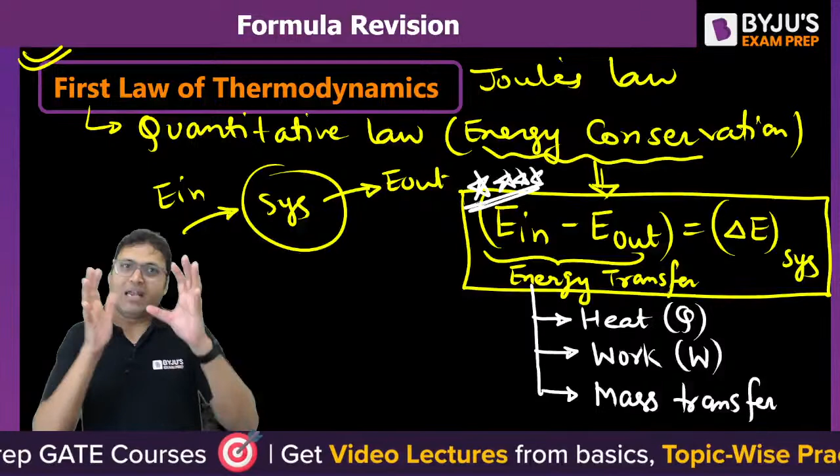So energy transfer is a boundary phenomena, but energy content of the system is not a phenomena, it is the property of the system. So the left hand side of the expression is energy transfer and the right hand side is the energy content of the system.

Are you getting it? So if the system is a closed system, what is the meaning of closed system? In case of a closed system, there is no mass transfer taking place, neither from the system to the surrounding nor from the surrounding to the system. Closed system means no mass transfer, only energy transfer.

Only energy transfer, isn't it? So energy transfer can either be in the form of heat and work. These are the two ways of transferring energy. There is no mass transfer, so energy transfer will take place.

So can we say our first law of thermodynamics, delta E for the system, is this Q minus W? The energy transfer is either in the form of heat. Let us say this is a closed system. Some energy entering into the system is in the form of heat, and energy leaving from the system is in the form of work.

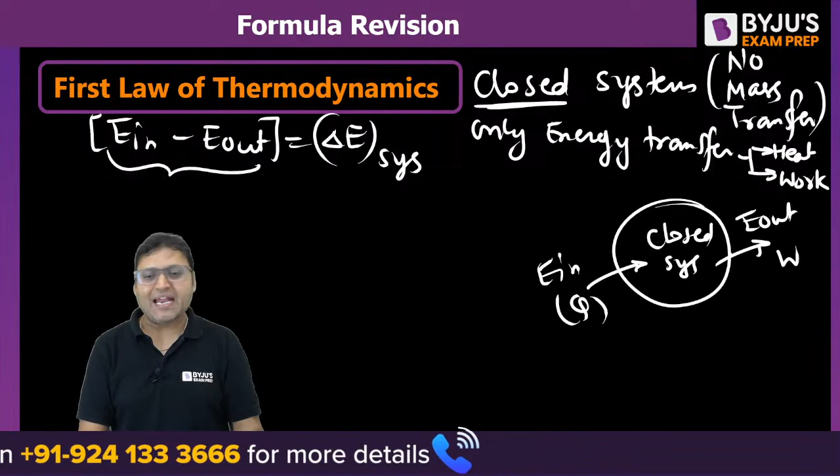So energy entering into the system is in the form of heat, and energy leaving from the system is in the form of work. Can we write it as: delta E, change in energy of a closed system, is equal to the sum of... so energy of a closed system is defined as...

Closed system energy is equal to sum of internal energy plus potential energy plus kinetic energy. For a closed system, the energy content is the sum of internal energy, potential energy, and kinetic energy.

So can we write our first law of thermodynamics for a closed system as Q minus W is equal to delta U plus delta potential energy plus delta kinetic energy? Do you guys agree or not? And one more thing I wanted to highlight here.

Whenever there is energy transfer taking place from the system to the surrounding or from the surrounding to the system, because the energy is in transition, that is why sign conventions are required for energy transfer. Whenever the energy transfer takes place, we always define a sign convention.

The general sign convention is: when heat is added to the system, it is taken as positive. When heat is rejected from the system, it is taken as negative. Similarly, when work is done by the system, it is taken as positive. Whenever work is done on the system, it is taken as negative.

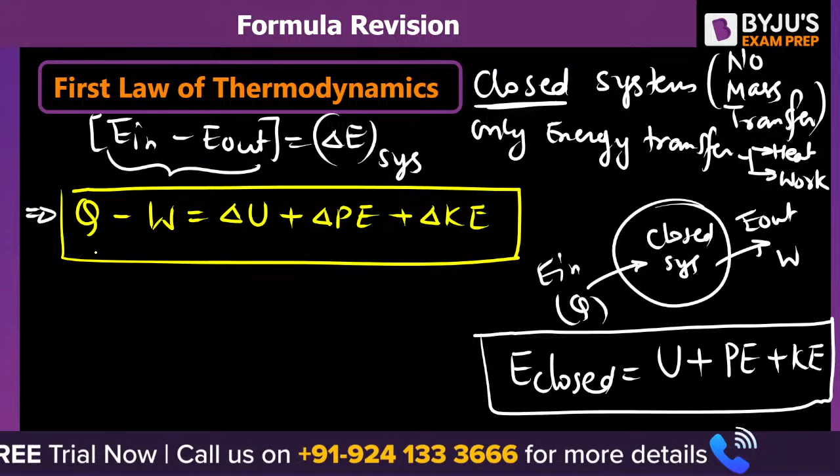So this is the expression if the closed system is stationary. That is for a closed system. This is the first law of thermodynamics for a closed system, if it is a stationary system, if it's a stationary closed system.

If it is a stationary system, what does that mean? There is no change in potential energy, there is no change in kinetic energy, it will be zero. So Q minus W is equal to delta U is our expression for the first law of thermodynamics for a closed stationary system.

This is the first law of thermodynamics for our closed and stationary system. Do you guys agree with it? Is this clear to everyone?

So whether the closed system is undergoing a reversible process or irreversible process, it does not matter. For the conservation of energy, reversibility or irreversibility of a process has nothing to do with it, because energy conservation is a universal concept or universal law. So whether the process undergone by the system is reversible or irreversible, the same expression will be used. I hope this is clear.

If anybody has anything to ask, let me know. Is this clear? Now, if the closed system is undergoing a thermodynamic cycle, what will be the expression for that?

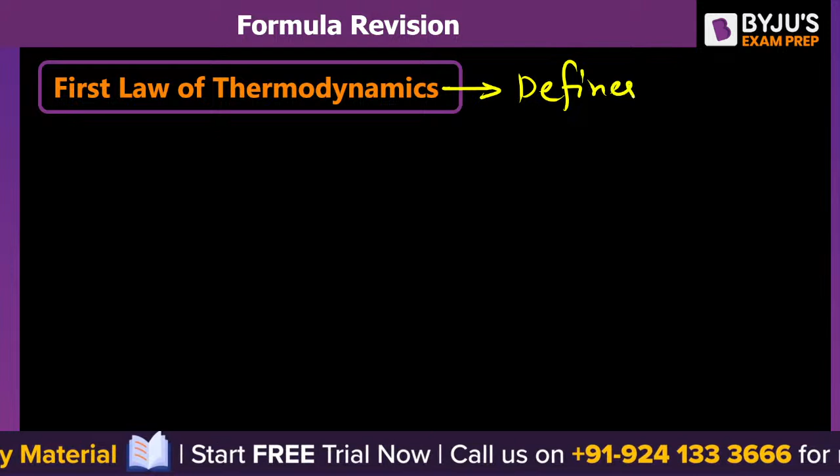First law of thermodynamics defines the energy of the system. According to this, energy is a conserved property of the system.

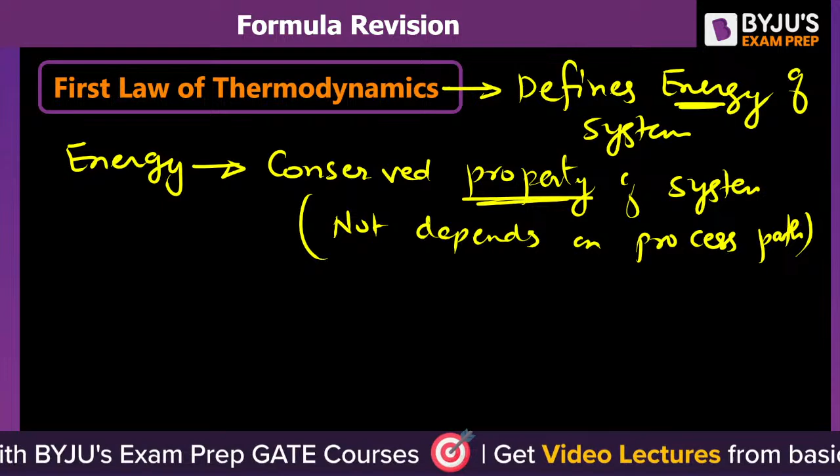It means energy does not depend on the process path, whether the process is reversible or irreversible. So energy of a system is a conserved property.

If we apply the first law of thermodynamics for a closed system undergoing a thermodynamic cycle, change in property will be zero, because for a thermodynamic cycle, initial and final states are the same.

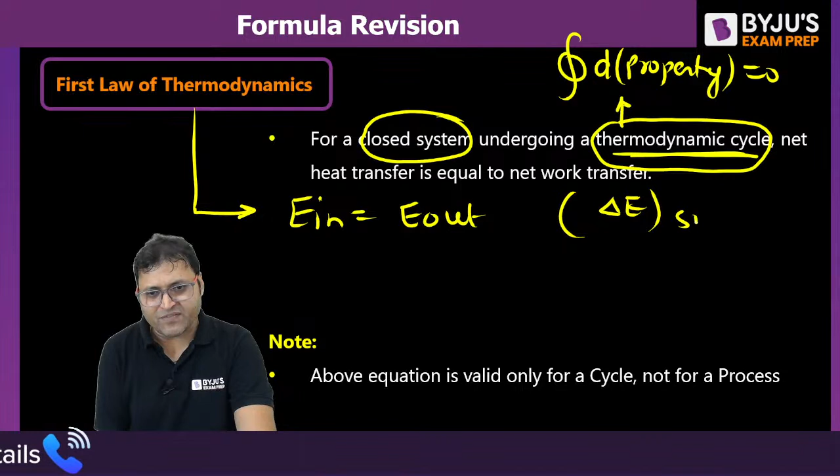So first law of thermodynamics can be written as E in is equal to E out, because change in energy of the system will be equal to zero. So energy entering will be equal to energy leaving from the system.

Energy entering takes place in the form of heat transfer, and energy leaving from the system takes place in the form of work transfer. So we can say Q net is equal to W net, or cyclic integration of del Q is equal to cyclic integration of del W. These are the various ways of writing the first law of thermodynamics for a thermodynamic cycle.

This is how we write the first law of thermodynamics for a cycle, and this equation is valid only for a cycle, whether it is reversible or irreversible, it does not matter. This equation, Q minus W is equal to delta U, is applied for a closed system undergoing a process.

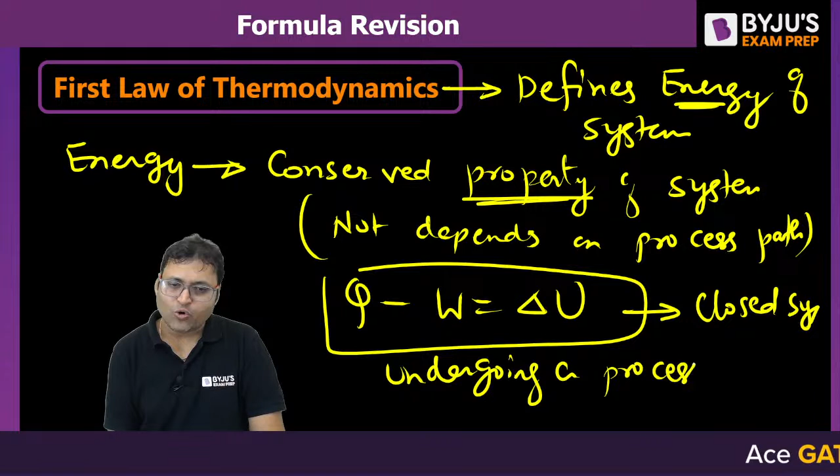Closed system undergoing a process, whether the process is reversible or irreversible. Or we could have written it as Q is equal to delta U plus W, one and the same thing. So this is the expression for a closed stationary system undergoing a thermodynamic process, and this equation is valid for a closed system undergoing a thermodynamic cycle.

As long as the bottle is closed, whenever there is no mass transfer taking place - if the bottle is open, then mass transfer will take place in terms of steam. The steam will evaporate from the system, then it becomes an open system. But as long as the cap is closed, the steam will not go out of the system, so that is why it is a closed system.

Closed system and open system are only defined with respect to the mass transfer. It has nothing to do with energy transfer. Closed or open system are defined only with respect to the mass transfer taking place across the system boundary. I hope this is clear.

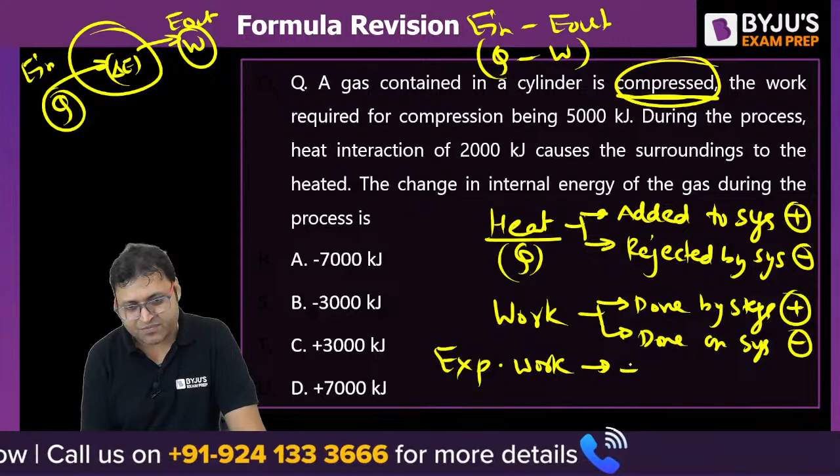For expansion, we can say work is done by the system. Expansion work is positive because it is done by the system, and compression work is negative because it is done on the system.

Expansion work is positive because the work is done by the system for expanding the gas, and compression work is negative because the work is done on the system to compress the gas.

So a gas contained in a cylinder is compressed. The work required for compression is 5000 kilojoule. Can we say W is equal to minus 5000 kilojoule?

Please give me yes. During the process, heat interaction of 2000 kilojoule causes the surrounding to be heated. When the surrounding gets heated, the heat is rejected by the system to the surrounding, isn't it?

So do you agree Q is also minus 2000? W and Q both will be negative.

Then the change in internal energy of the system during this process, if we write the first law of thermodynamics, Q minus W is equal to delta U. What is Q? Put the value along with sign. What is W? Put the value along with sign. Delta U is U2 minus U1, final internal energy minus initial internal energy.

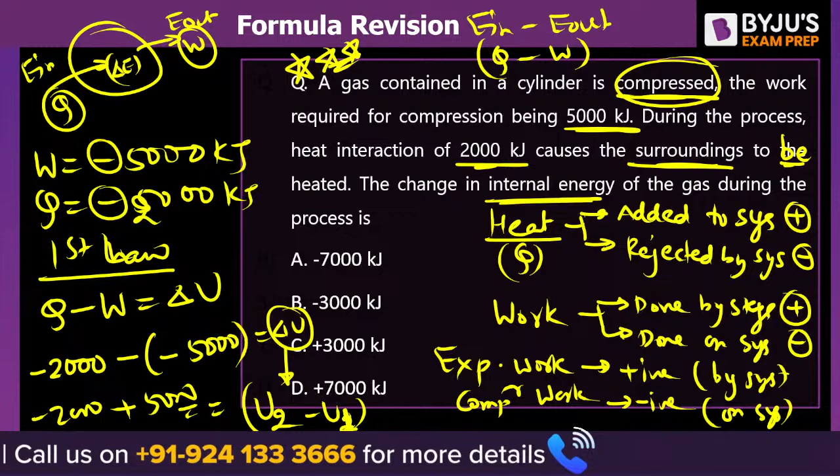Chintu, others, Paglesan, why you guys are committing the mistake? One incorrect sign convention will definitely destroy your whole fundamentals. It will shatter your fundamentals. So take care of the sign of heat transfer and work transfer.

So the correct answer is option number C. It will be plus 3000. I hope this is clear.

Let us move to the next one. Now I want everyone to give me the correct answer. Please do give me the right answer for this one. It is your turn. The more you practice on your own, the more confident you become. And the game is all about the confidence level.

If you are confident enough to clear the examination, 60 to 70% of the job is already done. But if you are afraid of clearing the examination, you will perform badly. So to develop the confidence, you should start writing on a piece of paper. Even if you are getting the incorrect answer, it does not matter.

So the answer to this question, every one of you, please give it a try. Yes, Paglesan, good, good, good. Mechanical engineer. In an adiabatic process, what is adiabatic process? Heat transfer is equal to 0.

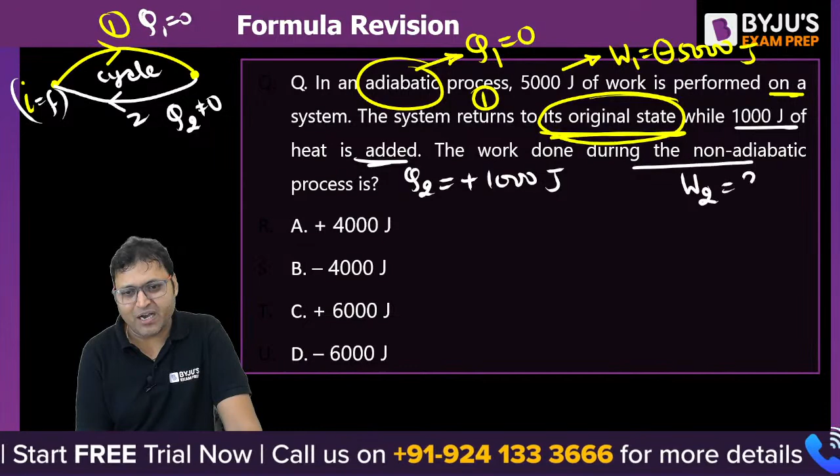The work done during the non-adiabatic process will be how much? So first law, if we apply for a cycle, then we can say energy entering is equal to energy leaving, or we can say net heat transfer is equal to net work transfer in a thermodynamic cycle. So the total heat transfer Q1 plus Q2 is equal to W1 plus W2. This will be the expression.

Q1 plus Q2 is equal to W1 plus W2. So Q1 is 0, and Q2 is plus 1000, which is equal to W1. W1 is minus 5000 plus W2. So you can easily find out the value of W2. Put the values with their signs properly, then you will get the answer.

What is the answer, Vinod? Is it B or C? Again you are committing a mistake. What is the answer, B or C? That is where you guys are committing mistakes. Do not repeat the mistake. Even if you commit the mistake once, it is acceptable. Even if you commit the mistake twice, it is a learning, it is an alarm sign. But if you repeat the same mistake a third time, then you should pay for it.

So it will be plus 6000. C will be the right answer. Well done, guys, well done. I hope this much portion is clear to everyone of you.

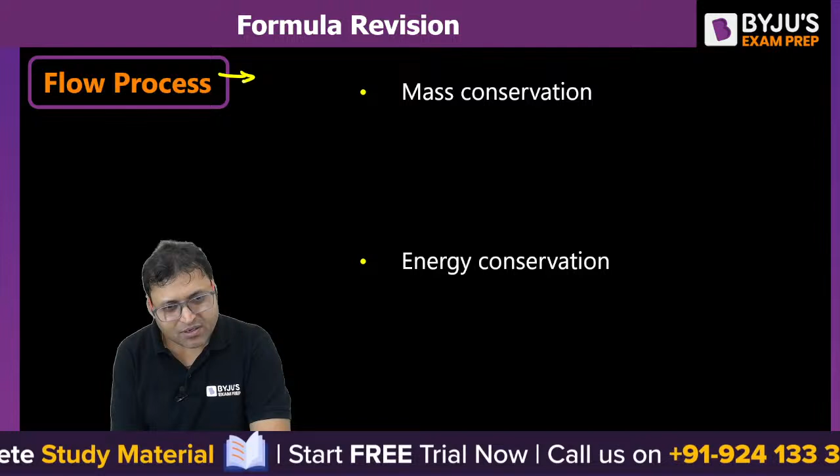Any doubt so far? Now let us try to observe the flow process. What is the meaning of flow process? When the mass flow takes place across the boundary of the system, such a system is called an open system. In an open system, there is mass transfer taking place.

So if we talk about the first law of thermodynamics for an open system, according to mass conservation, can we say mass entering minus mass leaving is equal to change in mass of the control volume? The analysis of the open system is done using the control volume approach.

Open systems are analyzed using the concept of control volume approach. This is a system, let us say an open system. Then there is mass entering and mass leaving. So according to mass conservation, whatever amount of mass entering minus amount of mass leaving from the system is equal to change in mass in the control volume.

Do you agree? Simple. Like energy conservation, mass conservation is also a fundamental or universal concept. Mass conservation and energy conservation are universal laws.

So if we write per unit time, we can say m dot I for inlet, minus m dot E for exit, is equal to the mass flow rate, which is equal to dm by dt in the control volume. The unit is kilogram per second. So the expression will be m dot I minus m dot E is equal to dm by dt. Do you agree? That is the simple mass conservation per unit time.

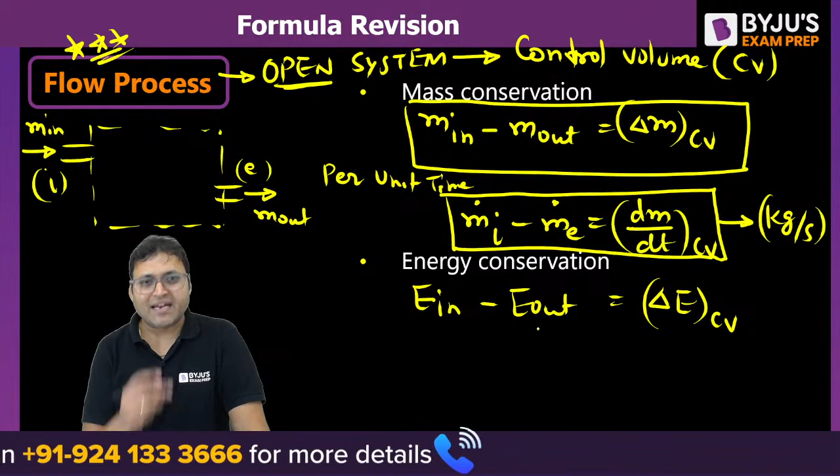Now if we talk about the energy conservation for a flow process, we can say energy entering minus energy leaving is equal to change in energy in the control volume. This energy transfer will be taking place with heat transfer, with work transfer, and along with mass transfer as well. So the left hand side will have three parameters: Q, W, as well as the mass transfer, isn't it?

If the process is a steady flow process—do you know what is a steady flow process? Does anybody have any idea about a steady flow process? Quickly, let me know. What do you understand by the steady flow process?

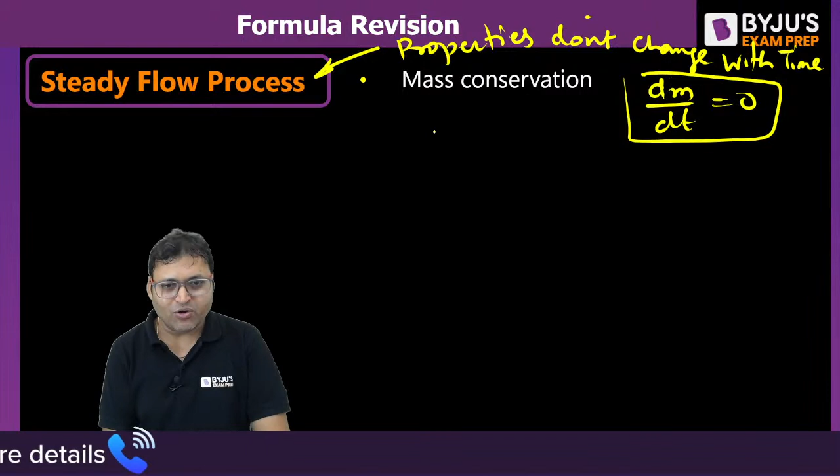If it is a steady flow process, it means the properties do not change with time, and mass is a property of the system. So we can say dm by dt is equal to 0, meaning change in mass with time is equal to 0. So the mass conservation equation becomes m dot I is equal to m dot E is equal to constant, which can be called m dot.

In case of a steady flow process, mass is entering at section 1 and leaving at section 2. This is our control volume. So we can say mass flow rate, rho 1 A1 C1, is equal to rho 2 A2 C2, is equal to constant.

What is mass flow rate? Rho AV, where C is the velocity, also written as V. So A1 C1, that is A1 into C1 by V1, is equal to A2 C2 by V2, remains constant. That is our mass conservation. What is C in this case? C is called the velocity of flow.

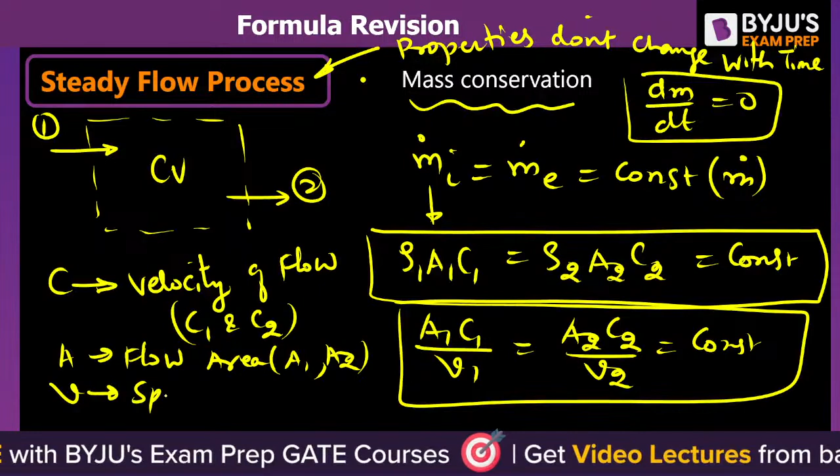Velocity of the flow of the fluid: C1 and C2 are at inlet and outlet. Similarly, rho is the density, A is the flow area - at inlet it is A1, at outlet it is A2. And V is the specific volume, which is the reciprocal of density. So at inlet it is V1, at outlet it is V2.

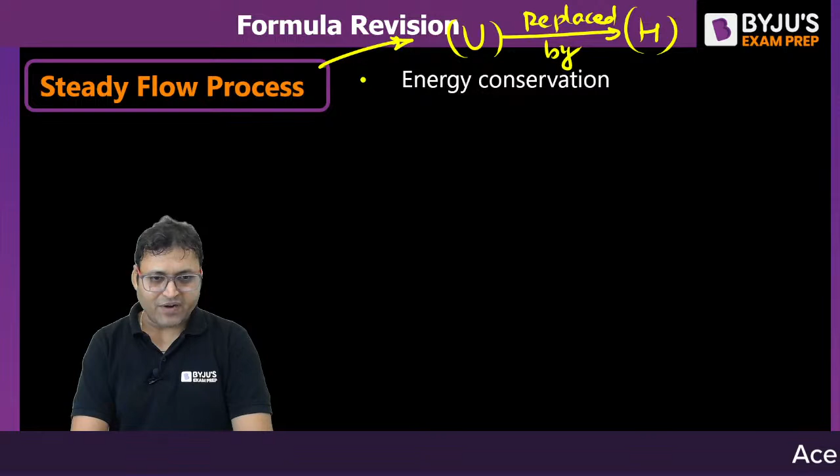So that is the mass conservation for a steady flow process. If we talk about the energy conservation for the steady flow process, then we can say in case of steady flow process, the internal energy will be replaced by enthalpy. So our expression for energy conservation will be Q minus W is equal to delta H plus delta potential energy plus delta kinetic energy. This is the energy conservation equation for the steady flow process.

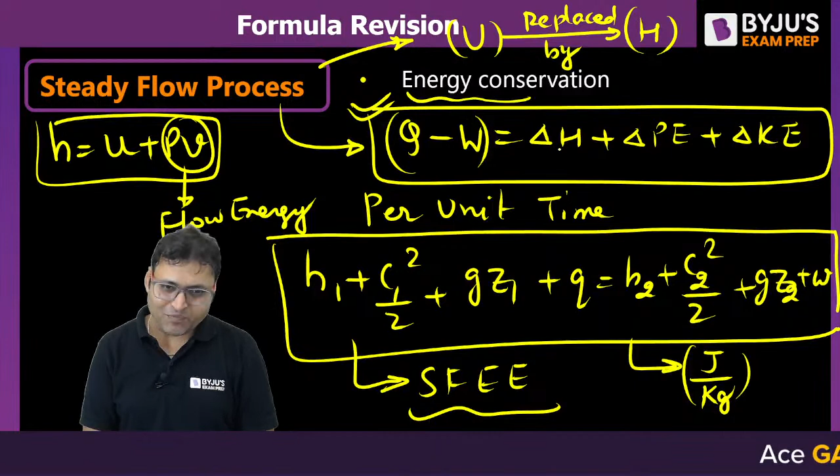Isn't it? If anyone has doubt where this expression came from, I can explain. In the left hand side there is a heat transfer, a work transfer, an energy transfer along with the mass transfer. In the right hand side, change in energy of the control volume. From this we will develop that internal energy will be replaced by enthalpy in case of steady flow process.

So steady flow energy equation is used for all the steady flow devices. What are the steady flow devices we use in our thermodynamic cycle? Like a compressor or turbine - turbine is a work producing device, compressor is a work consuming device, or it can be a heat exchanger like condenser or boiler, evaporator, or nozzle, diffuser.

All are treated as steady flow devices. Why are they called steady flow devices? Because they are operating in a particular environment for longer duration. So mixing chamber is also treated as steady flow device - these are some of the steady flow devices. Throttling device or throttling valve can also be treated as steady flow device.

So these are some of the steady flow devices where we apply the first law of thermodynamics, which is called steady flow energy equation: H1 plus C1 square by 2 plus GZ1 plus Q (heat transfer) is equal to H2 plus C2 square by 2 plus GZ2 plus W. 1 is for inlet or entry, and 2 is for outlet from the control volume or exit. The unit of each and every term is joule per kg.

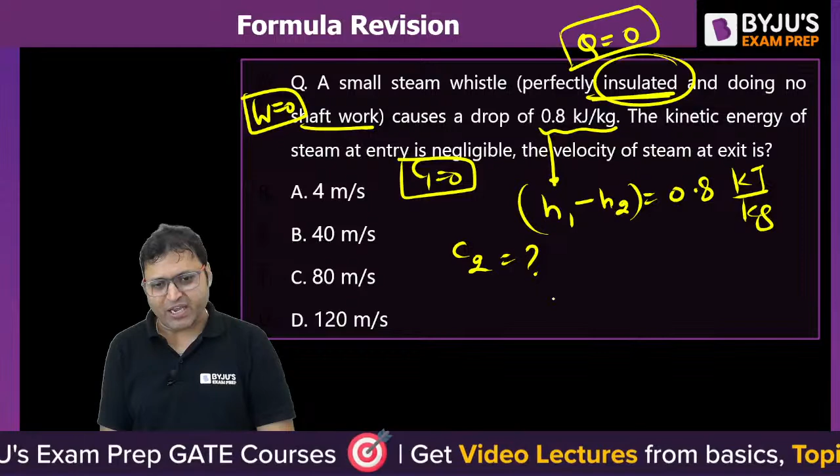H1 plus C1 square by 2 plus GZ1 plus Q is equal to H2 plus C2 square by 2 plus GZ2 plus W. C1 is 0, there is no change in potential energy, Q is equal to 0, W is equal to 0. So can we say C2 is equal to under root of 2 times H1 minus H2?

Put the value in their SI unit, do not forget to put the value in their SI unit. So 0.8 kilojoule per kg will become 800 joule per kg. So C2 will be equal to under root of 2 into 800. That will give you meter per second, isn't it?

So it is 40 meter per second will be the value of C2. The answer will be 40 meter per second. I hope this is clear. Is this clear to everyone?

Now let us move to the unsteady flow process. Unsteady flow process means change in mass in control volume is not 0.

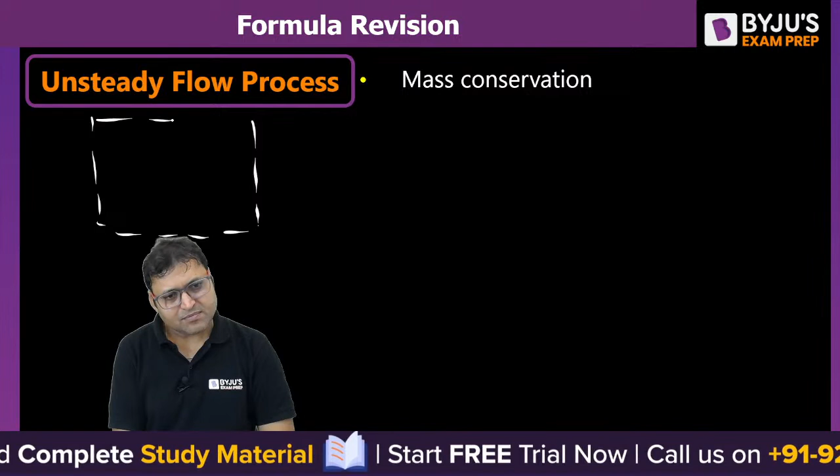Unsteady flow process. For unsteady flow process, there is mass entering, there is mass leaving, and there is some process undergoing by the system, 1 to 2. There is a process 1 to 2 undergoing by the system. 1 is the initial state and 2 is the final state. The state does not remain same with time, the properties will not remain same with respect to time. If the flow process is unsteady, so property changes with time.

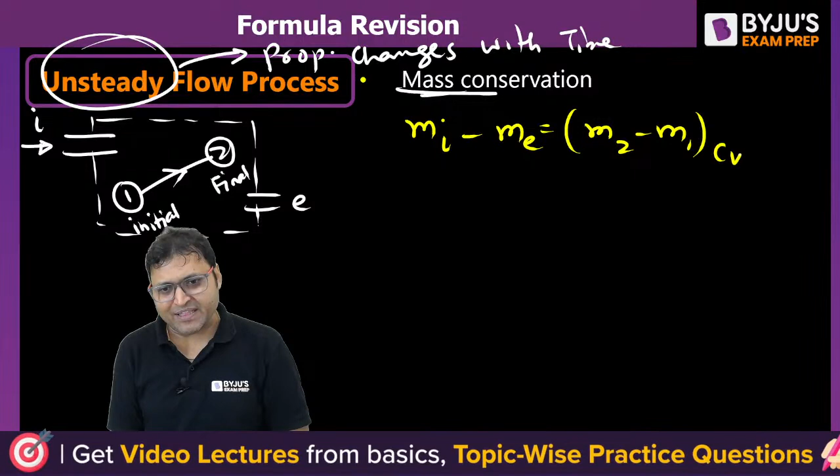So according to mass conservation, we can say Mi minus Me is equal to M2 minus M1 in the control volume. That is our mass conservation. Mi minus Me is equal to change in mass in the control volume. I for inlet or entry to the control volume, E for exit or outlet. 1 is the initial state of the system, 2 is the final state. This is the mass conservation equation: Mi minus Me is equal to M2 minus M1 in the control volume.

So if the system is initially evacuated, it means M1 is equal to 0. If the system is initially vacuum, if the system is initially empty, then M1 will be equal to 0. If the system is finally evacuated, then M2 will be 0. Please do understand, if the system is initially evacuated, then M1 is equal to 0, and if the system is finally evacuated, then M2 will be 0.

If there is no mass entering into the system, then Mi will be 0. If there is no mass leaving from the system, then Me will be 0. There are 4 different situations, accordingly we will put 0 whatever is applicable. Clear? If there is no mass entering into the system, Mi will be 0. If there is no mass leaving from the system, Me will be 0. If the system is initially evacuated, then M1 is equal to 0. If the system is finally evacuated, then M2 will be equal to 0.

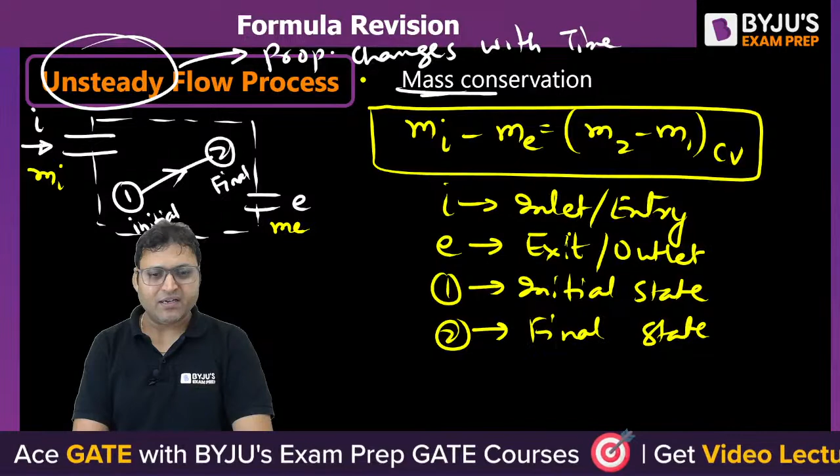If we write the energy conservation equation for unsteady flow process, so there is the heat transfer, 1 to 2. Let me call it heat transfer. Heat transfer to the system, work transfer from the system. This is I, inlet. This is exit, outlet. So there are 4 parameters, 4 points: I, E, 1 and 2. So heat is added to the system, work is done by the system. So according to the first law of thermodynamics or energy conservation equation, try to understand.

So it will be Q plus Mi. The energy conservation equation will be Q plus Mi Hi minus, this is E in, minus W plus ME HE, this is E out, is equal to M2 U2 minus M1 U1 in the control volume. That is the change in energy of the system. This is our first law of thermodynamics for

an open system undergoing unsteady flow process. The unit of each and every term is joule or kilojoule. The SI unit will be joule, and small u is the specific internal energy and small h is the specific enthalpy. It means joule per kg. Do you understand this expression? This is our energy conservation equation for the unsteady flow process. That completes our first law of thermodynamics. I hope this is clear to everyone.

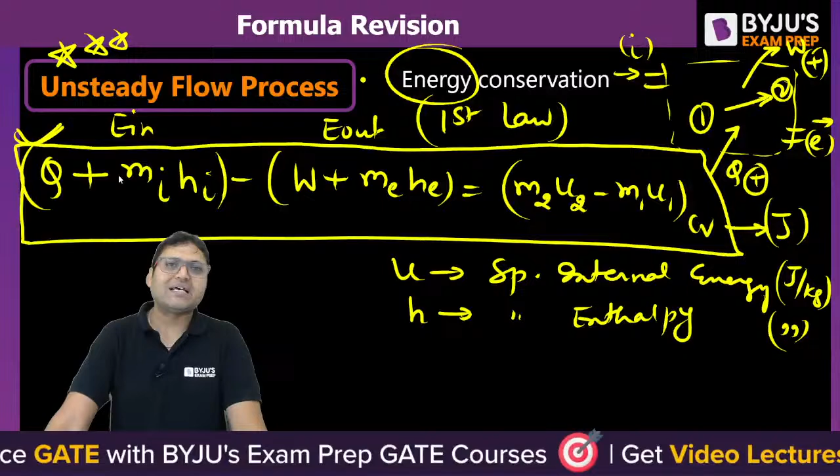Now let us move to the second law of thermodynamics. What do you understand by the second law of thermodynamics? Every one of you, please do let me know.

Second law of thermodynamics is also called qualitative law because it talks about the quality of energy. The quality of energy is not conserved, whereas it is the quantity of energy which is conserved. First law of thermodynamics is called quantitative law because it talks about the quantity of energy which is always conserved, whereas the second law talks about the quality of energy, which is not conserved. Quality means whether energy is in disorganized or organized form.

For example, heat is called low quality energy, because it cannot be converted into useful work easily, whereas work is called energy of high quality. Heat is low quality energy and work is high quality energy. It is also known as directional law.

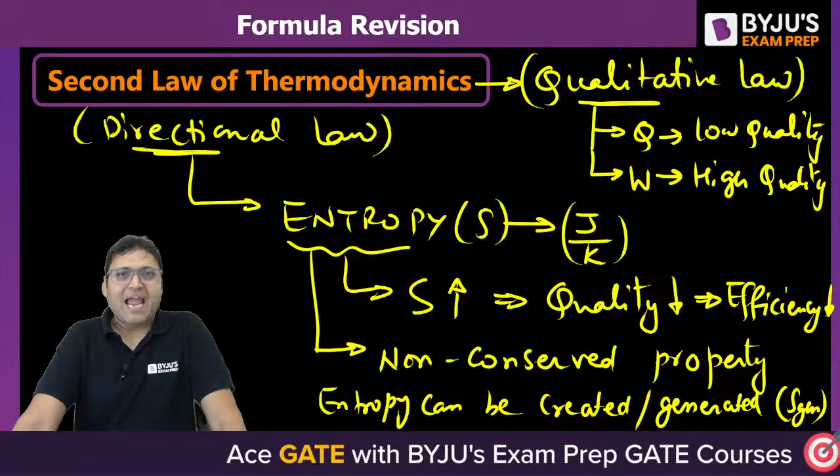How does entropy get generated? The entropy gets generated due to irreversibility associated with a process. I hope this is clear.

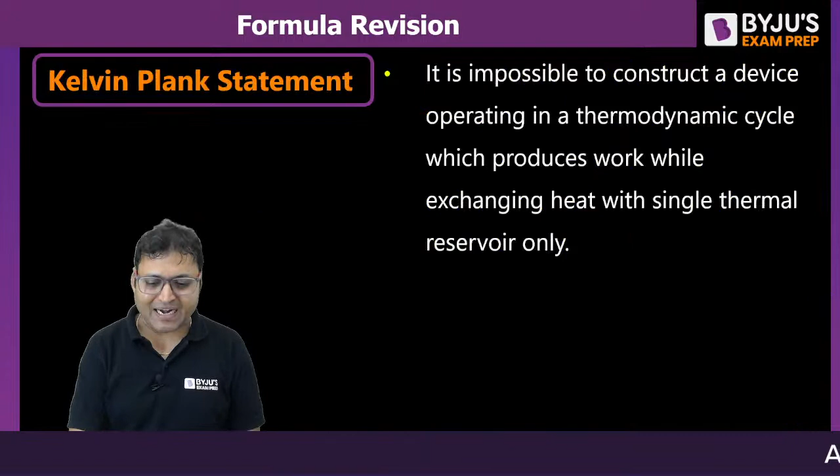We will talk about entropy later, but let us first focus on the second law of thermodynamics, which is called qualitative law or directional law. The second law of thermodynamics is the combination of two parallel statements: one is the Kelvin-Planck statement and another is the Clausius statement. Kelvin-Planck statement gives the concept of heat engine, whereas the Clausius statement gives the concept of heat pump and refrigerator. So what is the Kelvin-Planck statement of second law of thermodynamics?

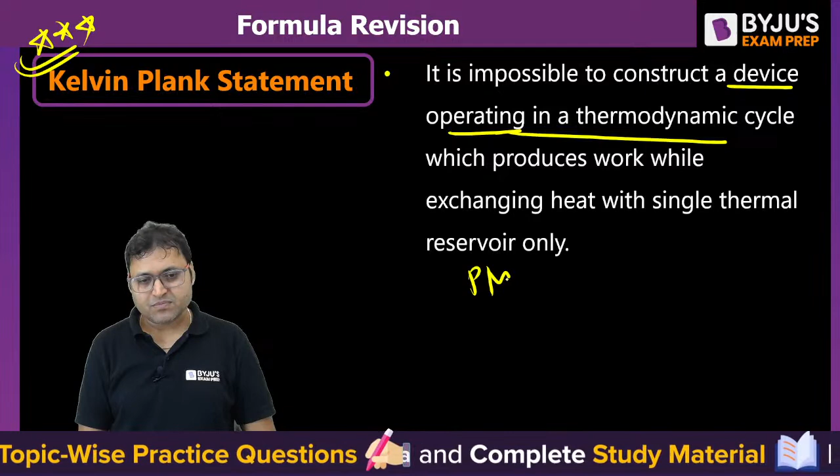According to Kelvin-Planck statement, it is impossible to construct a cyclic device which produces work while exchanging heat with a single reservoir only. That is called PMM2, perpetual motion machine of second kind, which is impossible.

When we supply heat and the system is undergoing a thermodynamic cycle, it cannot produce work completely, so work produced should not be equal to heat supplied. That is our PMM2, the machine which produces work while exchanging heat only with a single reservoir, so it is impossible. Work should always be less than heat supplied, it cannot be equal. That is our Kelvin-Planck statement.

Work produced should always be less than heat supplied to the thermodynamic cycle. So it gives the concept of heat engine. What does the heat engine involve? It requires two thermal reservoirs: one is the source which supplies heat, another is the sink which gets the heat, and the working fluid, which undergoes a thermodynamic cycle.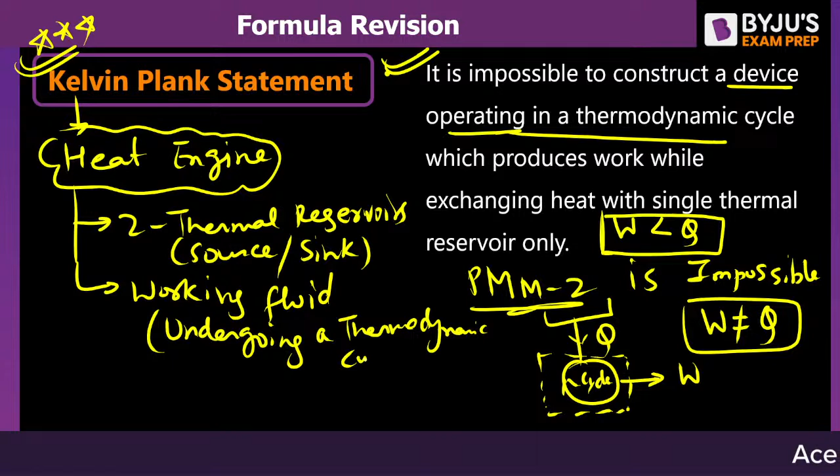Thermodynamic cycle - which is undergoing a thermodynamic cycle, isn't it? So heat engine looks like this. It is a work producing cyclic device. Heat engine is a work producing cyclic device. It is a clockwise cycle.

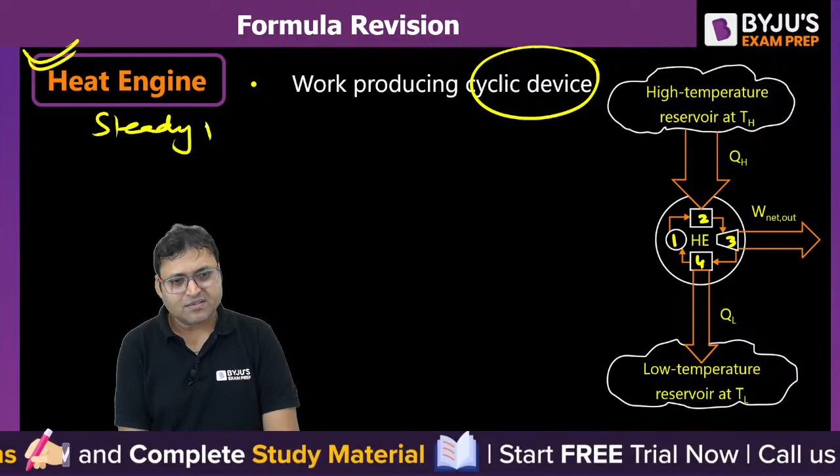There are steady flow devices 1, 2, 3 and 4 - there are 4 cyclic devices, steady flow devices where the working fluid is undergoing a cycle. One is a compressor, 2 is evaporator or boiler. Evaporator which gets the heat Q1 from the source. This is the source which is giving heat to our system. This is our system, which is a clockwise cycle.

The third device is a turbine which produces work, and the 4th one is a condenser which releases heat to the sink. Sink is the low temperature reservoir, source is the high temperature reservoir. Let me call the temperature of the source T1, temperature of the sink T2. This is our cyclic device, this is our thermodynamic heat engine, a heat engine working on a cyclic device.

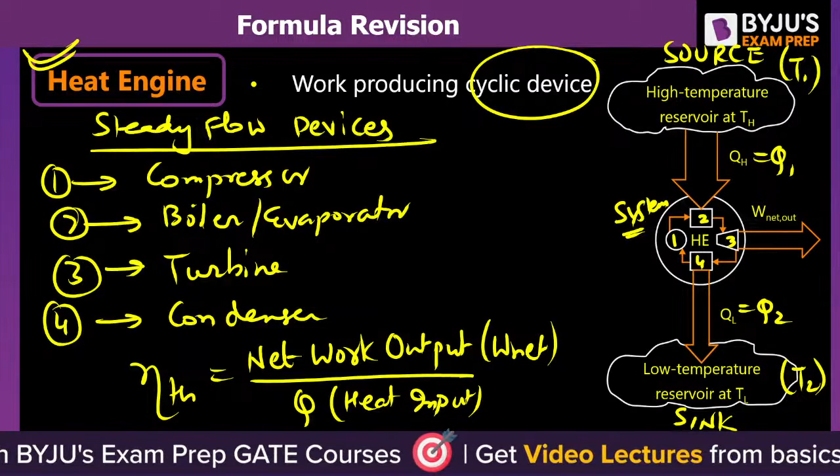So we define the thermal efficiency for this. How is the thermal efficiency defined? Thermal efficiency is equal to net work output, the ratio of net work output, that is W net, upon heat input. The ratio of net work output to the heat input. W net by Q is thermal efficiency. This is the thermal efficiency, isn't it?

So if we apply the first law of thermodynamics, we can say thermal efficiency is equal to net work output upon Q1. And from the first law, heat added to the system is equal to the heat rejected and the work done: Q1 = W plus Q2. So W net can be written as Q1 minus Q2. So the thermal efficiency is equal to 1 minus Q2 by Q1, which is less than 100%. This is the expression for thermal efficiency.

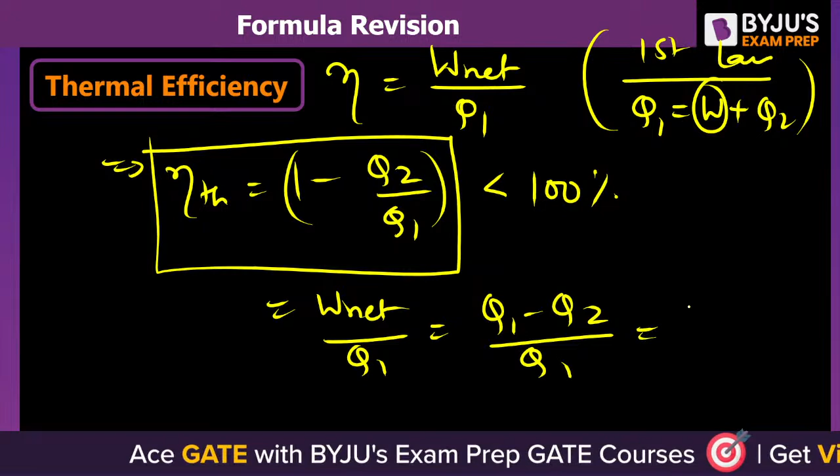So either we call it W net upon Q1, or Q1 minus Q2 upon Q1, or 1 minus Q2 by Q1. Q2 is the heat rejected to the sink. This expression is valid for reversible as well as irreversible cycles - it applies to both reversible and irreversible engines.

So if all the processes are reversible, we call it a Carnot thermodynamic cycle - a completely reversible cycle. What is the thermal efficiency of this cycle? It is the completely reversible cycle, Carnot cycle. All the processes are reversible, which is practically impossible - Carnot cycle is practically impossible. What is the thermal efficiency of Carnot cycle? Can anybody let me know? What will be the thermal efficiency of Carnot cycle?

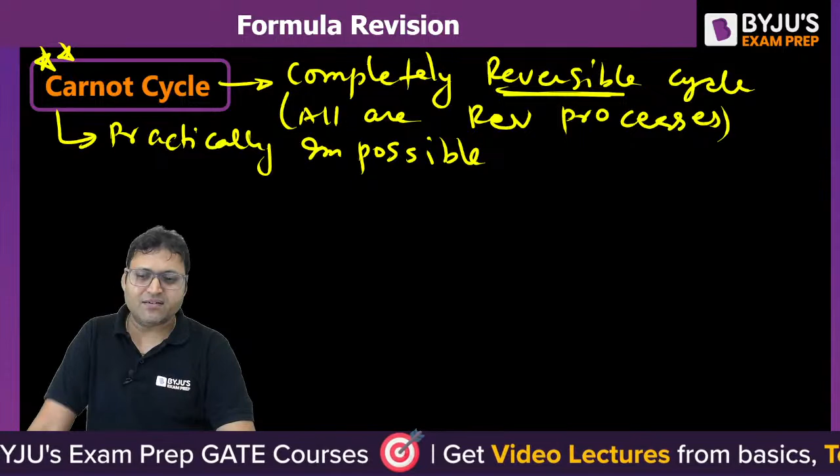So in case of Carnot cycle, we can say Q1 by T1 is equal to Q2 by T2. That is called the thermodynamic temperature scale. So if we write this way, the thermal efficiency of a reversible cycle is equal to 1 minus T2 by T1, or T1 minus T2 upon T1. That is for a Carnot cycle - thermal efficiency of Carnot cycle.

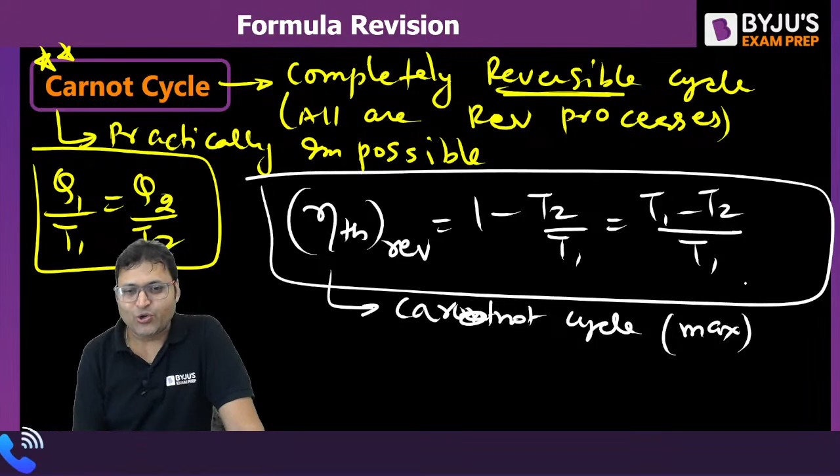Which is maximum - it has the maximum efficiency, but it is not 100%. Do not think that it is 100%. No engine can have efficiency 100%. T2 is the sink temperature here, the lower temperature reservoir, low temperature reservoir. And T1 is the source temperature, the high temperature reservoir. So this is the expression for thermal efficiency for the Carnot cycle. So when the cycle is reversible, we use this expression. For an irreversible cycle, we use the general expression.

Can you solve this one, this question, everyone? Please give it a try. What is the answer? A cyclic heat engine does 50 kilojoule of work per cycle.

This is the work produced. If the efficiency of the heat engine is 75%, or thermal efficiency is 0.75, find the heat rejected per cycle, Q2. If we draw this, Q1 is heat added to the heat engine, then there is heat rejected and work is done. So applying the first law of thermodynamics, the question is to find Q2, W is given as 50 kilojoule. So thermal efficiency can be written as W by Q1, so we can say Q1 is equal to W by thermal efficiency. What is Q1? Q1 is 50 upon 0.75, that is Q1. But the question is to find Q2.

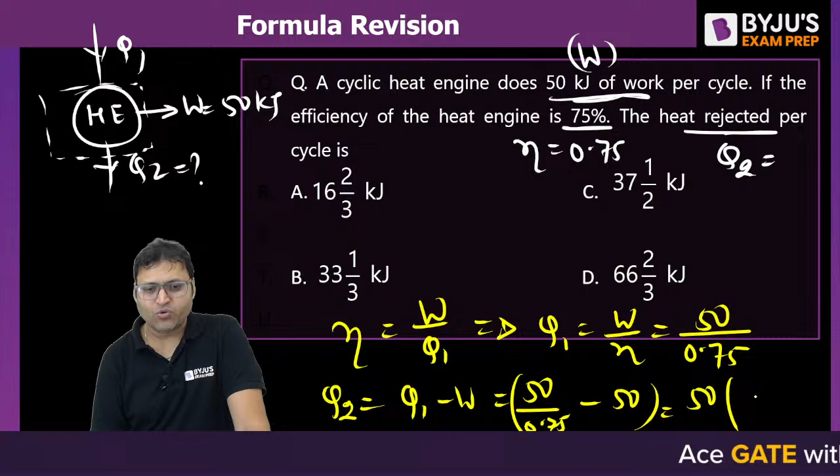So isn't it Q2 is equal to Q1 minus W? Q2 is equal to Q1 minus W. So 50 upon 0.75 minus 50 will give you the answer. So 50 into 1 by 0.75 is 4 by 3, minus 1, so it is 1 by 3. 50 into 1 by 3, 50 by 3 - Q2 will be equal to 50 by 3 kilojoule. Q2 will be 50 by 3 kilojoule. What is the answer?

So 50 by 3 kilojoule, which is 16 2 by 3 kilojoule, isn't it? Is this clear?

Let us move further. The another statement is called the Clausius statement of second law of thermodynamics. According to this statement, it is impossible to construct a cyclic device which transfers heat from a lower temperature body to a higher temperature body without any external work. Heat cannot flow from low temperature to high temperature.

Heat cannot flow from low temperature to high temperature without any external support. So if we want heat to flow from low temperature to high temperature, there must be work done.

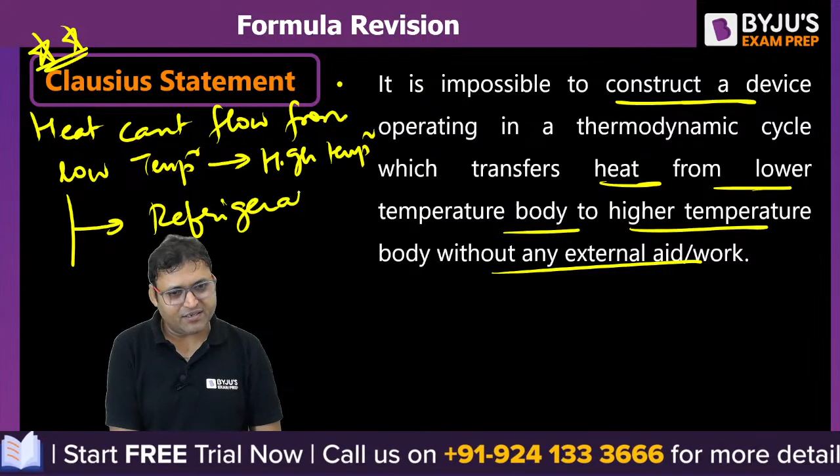So the Clausius statement of second law of thermodynamics gives the concept of refrigerator and heat pump. So what is the refrigerator? Refrigerator is a work consuming cyclic device which maintains the lower temperature.

This is the desired output, desired effect, that is Q2, and this is Q1. This is our source and this is the sink. So it is a work consuming cyclic device which maintains a lower temperature compared to the surrounding. This is the surrounding, this is our cold storage space. So this is the refrigerator, it is work consuming, so an anti-clockwise cycle.

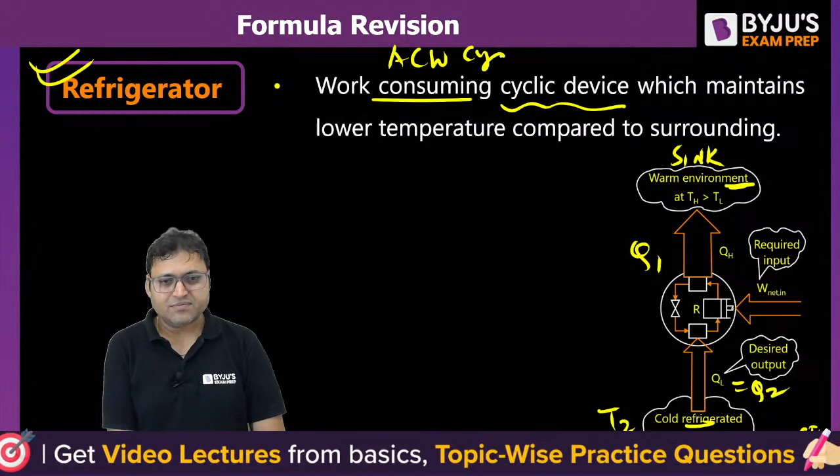Here we define coefficient of performance, that is the ratio of desired output to the work input or net work input. COP, coefficient of performance, is Q2 upon W.

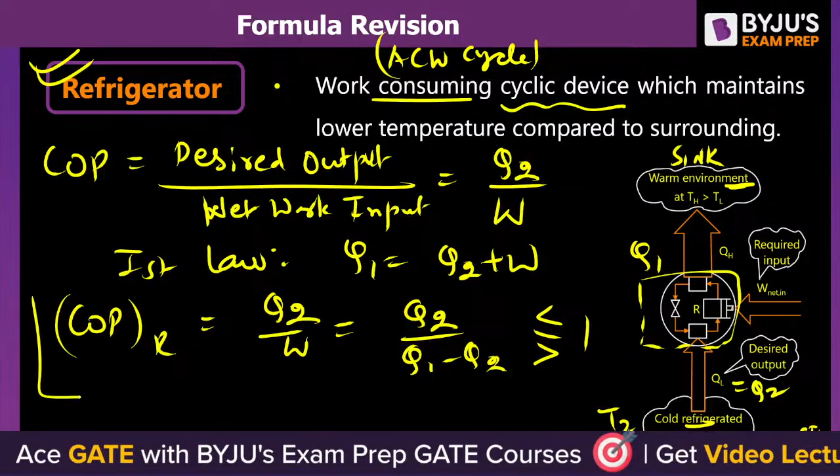From the first law of thermodynamics, we can say Q1 is equal to Q2 plus W. So COP for a refrigerator is given by Q2 by W, or we can write Q2 upon Q1 minus Q2, which can be less than, equal to, or greater than 1.

As the coefficient of performance increases, the thermal performance increases and running cost decreases. So more is the coefficient of performance, less will be the running cost, isn't it? So this is about the refrigerator.

Refrigeration effect is the value of Q2. There is a term defined as the refrigeration effect: the amount of heat to be extracted from the storage space in order to maintain the lower temperature. Q2 is the refrigeration effect.

The refrigeration effect unit is ton. Sometimes we use ton as the unit. 1 ton is equal to 3.5 kilojoule per second or 210 kilojoule per minute. That is how we can convert.

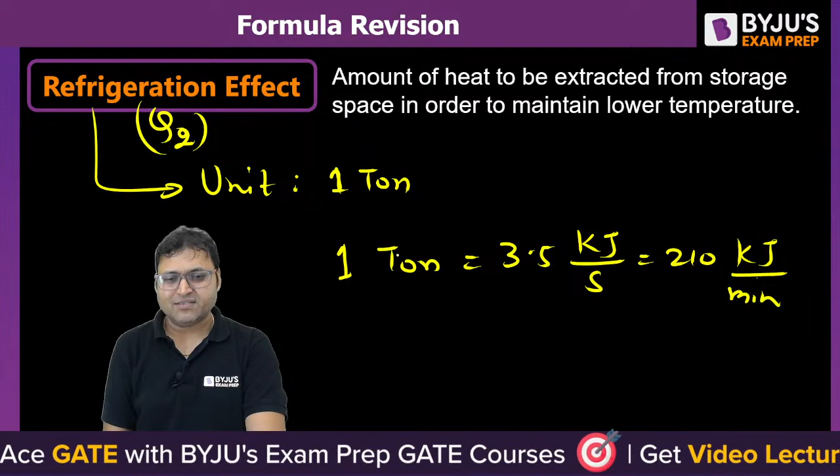So Q2 is called the refrigeration effect. Sometimes questions are asked about the refrigeration effect: 3.5 kilojoule per second, which is kilowatt, or 210 kilojoule per minute. This is the refrigeration effect.

Then there is another work consuming cyclic device called the heat pump. In a heat pump, the desired output is maintaining the higher temperature. This is T1, this is T2. So it is a work consuming cyclic device which maintains higher temperature, and the desired output is maintaining the higher temperature Q1.

COP for the heat pump is equal to Q1 upon W, or we can say Q1 upon Q1 minus Q2. This is the expression for COP for the heat pump.

As long as reversible cycle is not mentioned, we cannot write it in terms of temperatures. So what we need to understand is that for the same heat transfer, same input and output,

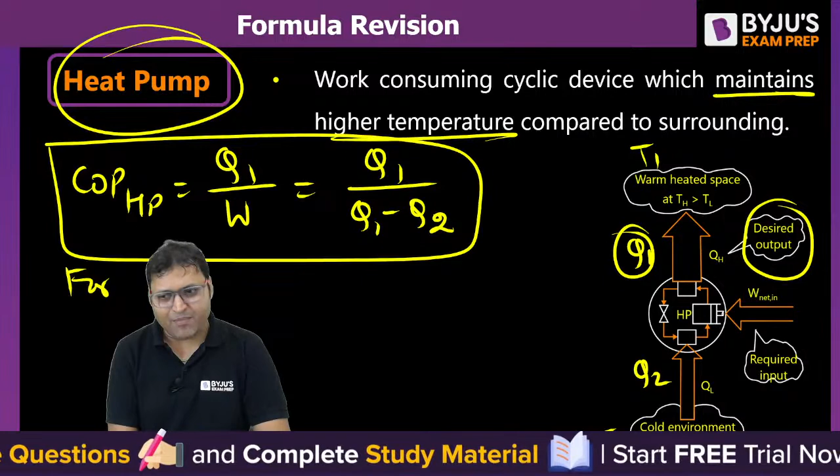we can develop: COP for the heat pump is equal to COP for the refrigerator plus 1. So COP for the heat pump is always greater than 1, whereas COP for the refrigerator can be less than, equal to, or greater than 1.

For a refrigerator, it can be less than, equal to, or greater than 1. But for a heat pump, it is always greater than 1.

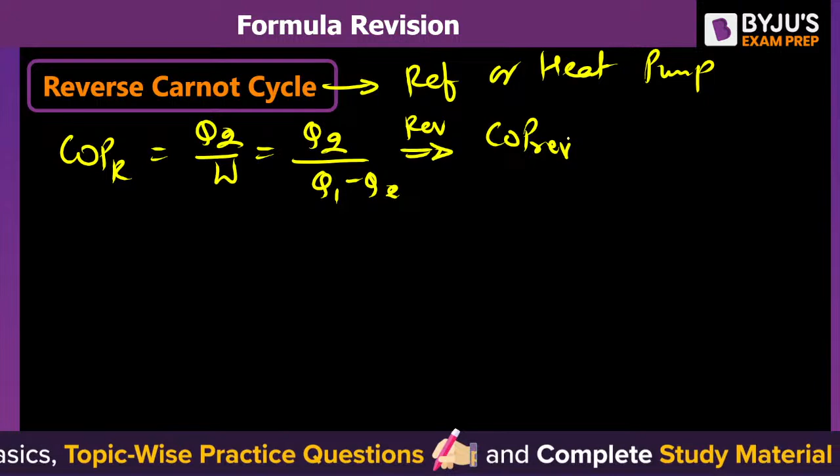If it is a reverse Carnot cycle, refrigerator or heat pump, then COP for the refrigerator, which is Q2 by W or Q2 by Q1 minus Q2 — if it is reversible, then COP for the reversible refrigerator will be equal to T2 upon T1 minus T2.

Similarly, COP for heat pump is valid for both reversible and irreversible cases. COP for the heat pump is given as Q1 by W, or Q1 upon Q1 minus Q2. But if it is a reversible cycle, then COP for the reversible heat pump is equal to T1 upon T1 minus T2.

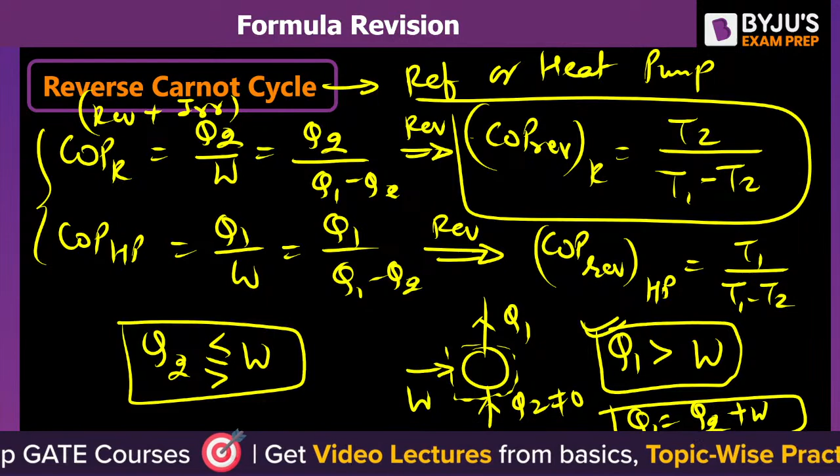Q1 is always greater than W, it cannot be equal as well. Q1 is always greater than W, whereas Q2 can be less than, because from the first law of thermodynamics, Q1 is equal to Q2 plus W. Q2 cannot be 0, it cannot be 0. Otherwise it will violate the Kelvin-Planck statement, since one single reservoir will not develop a cyclic device. So Q2 will never be 0.

So Q1 will always be greater than W, and Q2 can be less than W, can be equal to, can be greater than W. So from here we can easily say COP for refrigerator can be less than 1, can be equal to 1, can be greater than 1. But for a heat pump, COP cannot be less than or equal to 1, it will always be greater than 1. I hope this is clear.

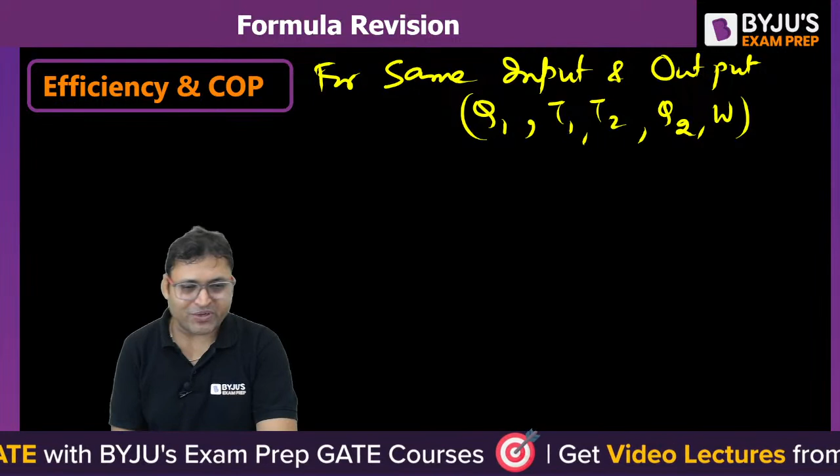Isn't it? So if we talk about the thermal efficiency, we can say for same input and output Q1, T1, T2, Q2 and W, if there are same input and output, then we can say COP for heat pump is equal to 1 upon thermal efficiency of the engine, which is equal to COP for refrigerator plus 1. This is what we can write. For a heat pump, COP is reciprocal of thermal efficiency, and COP for the heat pump is refrigerator COP plus 1.

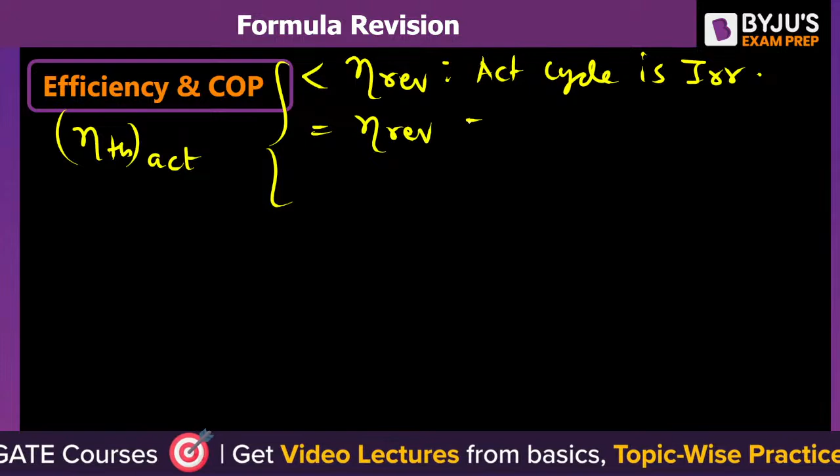That you should always remember for the same input and outputs. And one more important thing, when the thermal efficiency of actual cycle is less than thermal efficiency of reversible cycle, then actual cycle is irreversible. If it is equal to thermal efficiency of reversible cycle, then actual cycle is reversible. When it is greater than thermal efficiency of reversible cycle, then actual cycle is impossible.

Similarly, for COP, we are talking about work consuming cycle: if COP for actual cycle is less than COP for a reversible cycle, then actual cycle is irreversible. If it is equal to COP for reversible cycle, then actual cycle is reversible. If it is greater than COP for a reversible cycle, such a cycle is impossible. We can easily find out whether a particular cycle will be possible or impossible, or whether a cycle is reversible or irreversible, based on this condition. Is this clear?

There is a question on the screen. Quickly solve this one. A condenser of a refrigeration system rejects heat at the rate of 120 kilowatt while its compressor consumes a power of 30 kilowatt. Find the coefficient of performance of the system. It is the refrigeration system. What is the answer? What will be the answer?

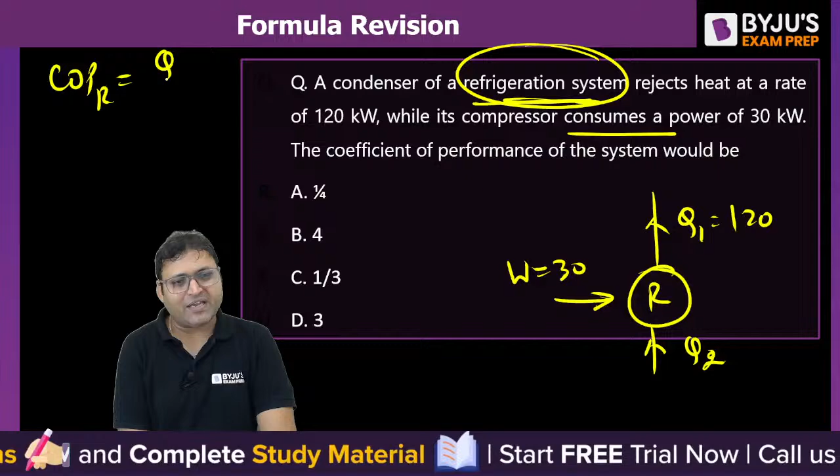Condenser rejects heat at the rate of 120, so condenser rejects heat means Q1 is 120. This is a refrigerator and the compressor is consuming a power of 30, so W is equal to 30. So COP, this is Q2. First of all, for COP of a refrigerator, we can say Q2 by W, because desired output is Q2 to maintain the lower temperature. The objective is to maintain the low temperature. First find out the value of Q2. Can you find out the value of Q2? Q2 will be equal to 90 kilowatt, isn't it? Q2 is equal to Q1 minus W, which is 120 minus 30, that is 90 kilowatt. So Q2 is 90 and W is equal to 30, so the COP will be 3. COP of the refrigerator will be 3.

Another question on your screen.

Next question on your screen. Then after this we will move to entropy. We will try to analyze the concept of entropy quickly.

Efficiency of a Carnot engine is 75%. Carnot engine means reversible engine. If the cycle direction is reversed, what is the COP of the reverse Carnot refrigerator?

COP for the heat pump is equal to 1 upon thermal efficiency, which is equal to COP for refrigerator plus 1. From here we need to find the COP for the refrigerator. 1 upon 0.75 is equal to COP for refrigerator plus 1. So COP for refrigerator equals, what is 1 upon 0.75? That is 4 by 3.

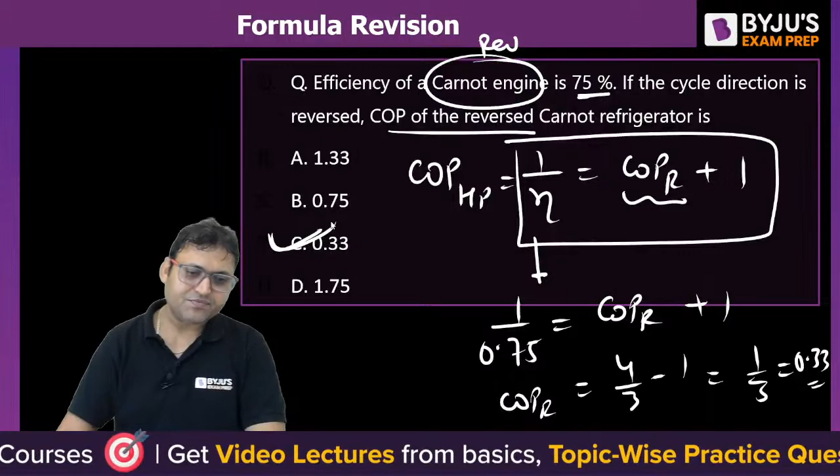Now to define entropy, we talk about the Clausius inequality. As per the Clausius inequality, we find the cyclic integration of del Q by T, and if it is less than 0, then the cycle will be irreversible.

Actual cycle will be irreversible. And if it is equal to 0, then actual cycle is reversible. If it is greater than 0, then actual cycle is impossible.

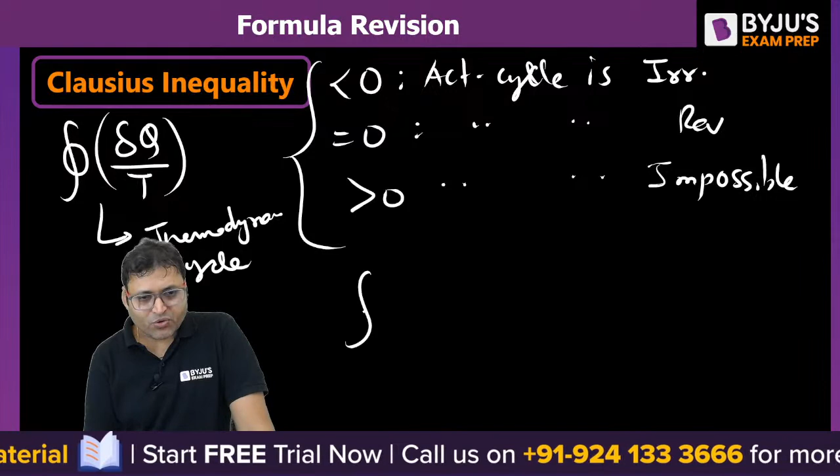So cyclic integration of del Q by T for a thermodynamic cycle should always be less than 0. So del Q by T should always be less than or equal to 0 for any thermodynamic cycle, whether reversible or irreversible.

In the case of a refrigeration cycle, the expression is valid for a refrigeration or heat pump cycle as well. It is valid for refrigeration cycle, heat pump cycle, as well as heat engine cycle. So in case of a refrigeration system undergoing an irreversible process, cyclic integration of del Q by T should always be less than 0. Yes, it should always be less than 0.

Yes, others. Yes, Paglisan. Well done. Good.

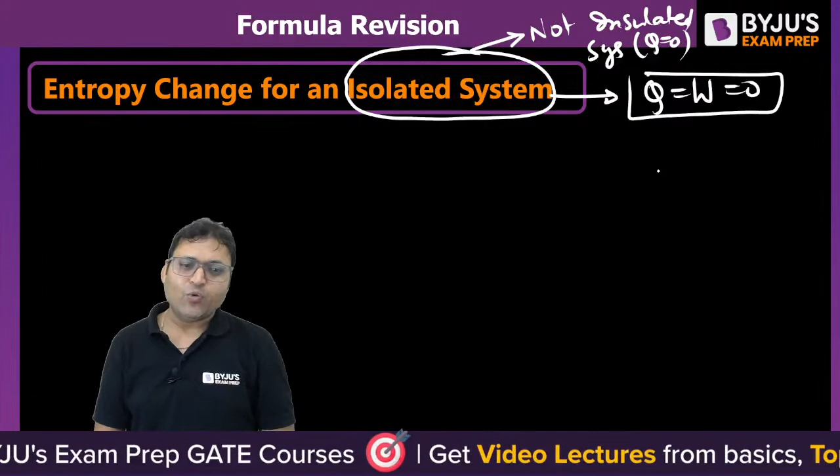Then if we talk about entropy change for an isolated system, do you know what an isolated system is? Isolated system is not the same as insulated system. Insulated system has Q equal to 0, but isolated system has Q equal to W equal to 0. There is neither heat transfer, work transfer, nor mass transfer. For an isolated system, heat, work and mass transfer will be 0. Insulated system is only when heat transfer is 0.

So if we talk about the isolated system, it is the universe. Universe can be treated as isolated system, that is system plus surrounding. So change in entropy for the isolated system or universe, which is equal to change in entropy for the system plus change in entropy for the surrounding, should be greater than 0.

That is called entropy generation. It should always be greater than 0. Entropy change for the universe should always be greater than 0. This is for an isolated system.

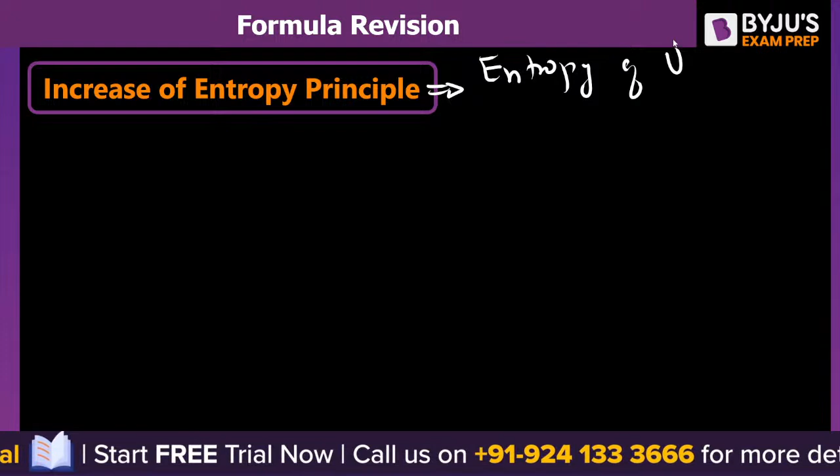And then we define the increase of entropy principle. So entropy of universe always increases. What is the entropy principle? Entropy is a non-conserved property. There is generation of entropy due to irreversibility. Entropy generation is due to irreversibility.

So what we can say is, entropy of universe always increases. For any process to be possible, entropy of the universe must increase, or it can remain constant for a reversible process. For example, if we talk about change in entropy for the universe, or entropy generation, if it is less than 0...

Entropy change for the universe, or entropy generation, that is the sum of entropy of system and surrounding, if it is less than 0, then the process is impossible.

If it is equal to 0, the process is reversible. And if it is greater than 0, then the process is irreversible.

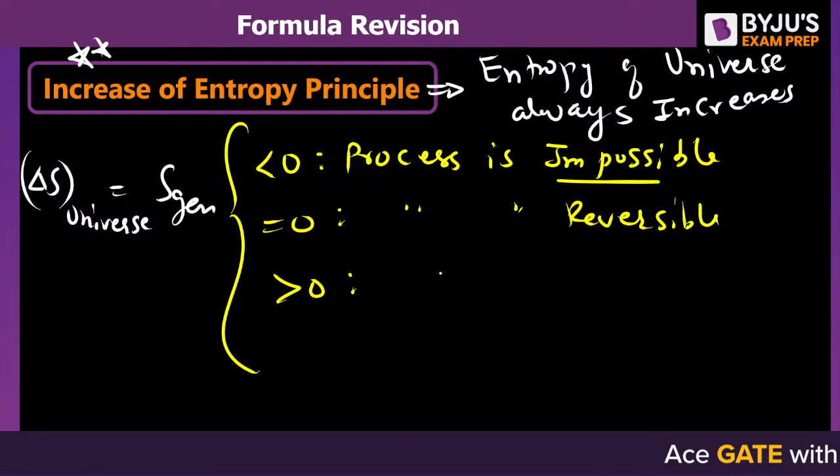So that is how the second law of thermodynamics gives direction to a particular process, through the concept of entropy.

If the entropy generation is equal to 0, the process undergone by the system is reversible. If the entropy generation is less than 0, such a process is impossible. And if the entropy generation is greater than 0, then the process undergone by the system is irreversible. So that principle is called the increase of entropy principle. And for a process to happen, it must satisfy the first law as well as the second law.

There is a question on the screen.

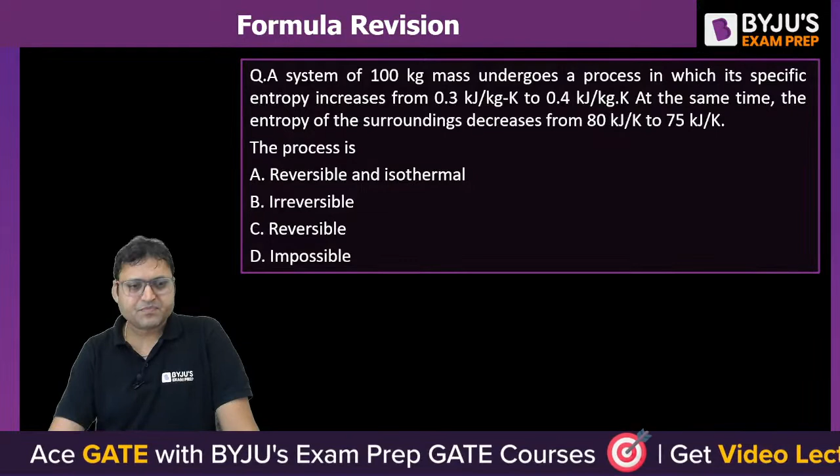A system of 100 kg mass undergoes a process in which its specific entropy increases from 0.3 to 0.4. What is the change in entropy of the system? That is 0.4 minus 0.3, which is equal to 0.1.

At the same time, the entropy of the surrounding decreases. This was the specific entropy, so first find out the total entropy change for the system: kilojoule per kg Kelvin multiplied by the mass, that is 0.1 multiplied by 100, so it will be 10 kilojoule per Kelvin.

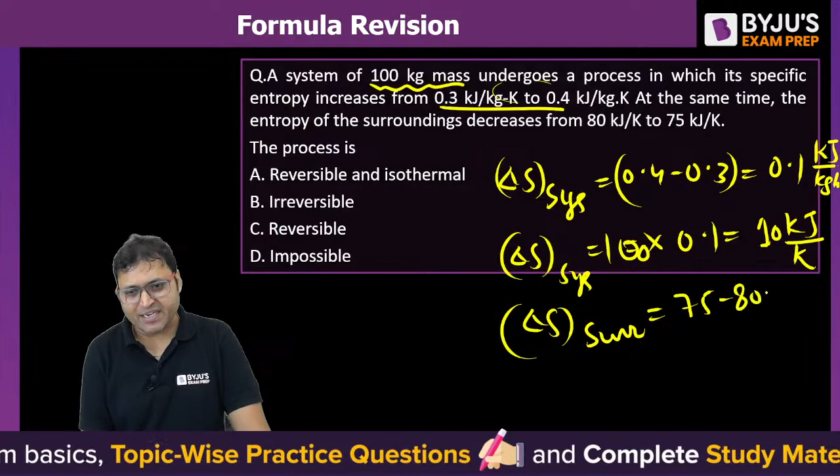So the entropy of the surrounding decreases from 80 to 75. 75 minus 80, that is minus 5 kilojoule per Kelvin. So change in entropy of the surrounding is minus 5, and change in entropy of the system is 10.

So what is the change in entropy for the universe? That is equal to entropy generation, which is change in entropy for the system plus change in entropy for the surrounding: plus 10 minus 5, so it will be plus 5 kilojoule per Kelvin. S generation is plus 5.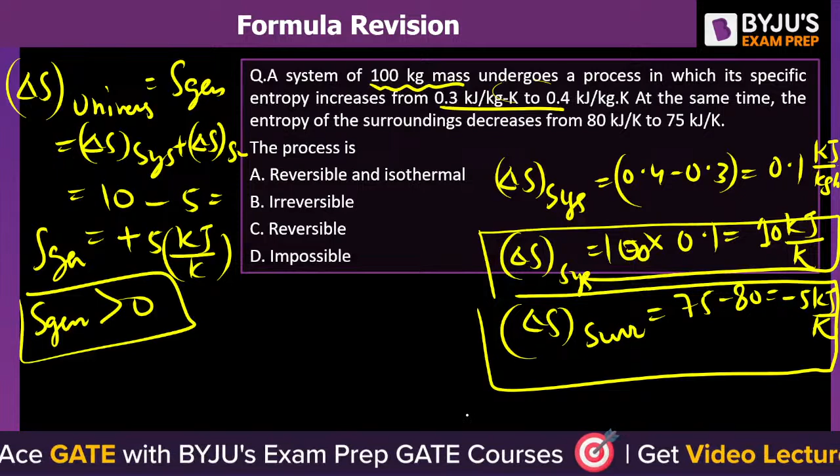Because we are getting entropy generation as positive, it means the process undergone by the system is irreversible. Yes, the process will be irreversible. B is the correct answer. B for Bombay will be the right answer for this given question.

Now, entropy change for a reservoir, or fluid undergoing a phase change, means temperature remains constant. Let me call it T naught. So in that case, the entropy change for a reservoir is Q by T naught, joule per Kelvin.

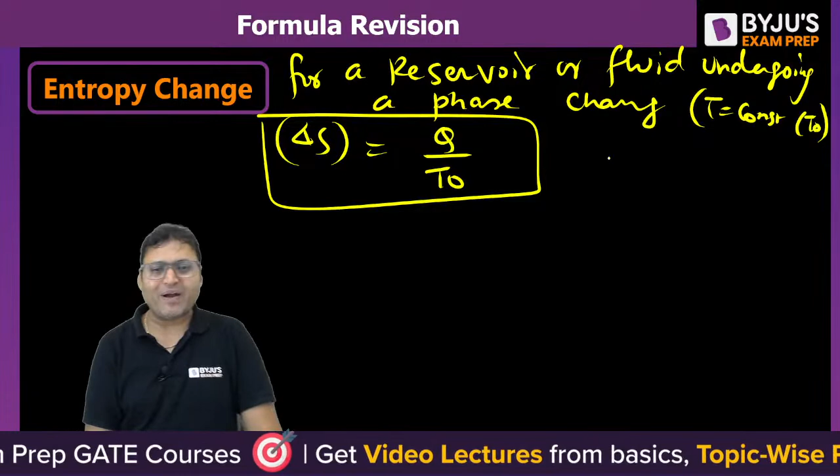So for a finite body, entropy change for a finite body or fluid undergoing a temperature change: temperature will not be constant here. In that case, change in entropy is equal to M into C into ln of Tf by Ti, joule per Kelvin, after integration.

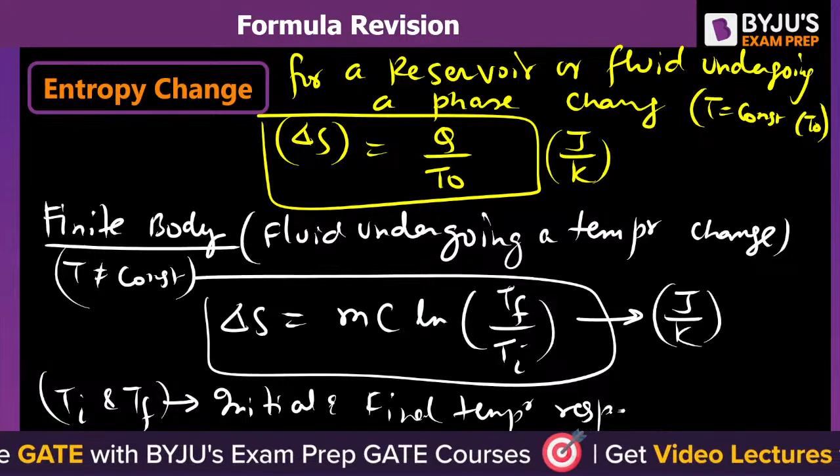Ti and Tf are the initial and final temperature respectively. Is this clear? M is the mass of the system, and C is the specific heat of the system.

For an ideal gas, entropy change is again important. Specific entropy delta S is equal to Cv ln of T2 by T1 plus R ln of V2 by V1. It is in terms of temperature and volume, and the unit is joule per kg Kelvin.

Delta S is also equal to Cp ln of T2 by T1 minus R ln of P2 by P1, in terms of temperature and pressure. And delta S equals Cp ln of V2 by V1 plus Cv ln of P2 by P1, as a function of pressure and specific volume. The unit of each expression is joule per kg Kelvin since they are specific entropy changes.

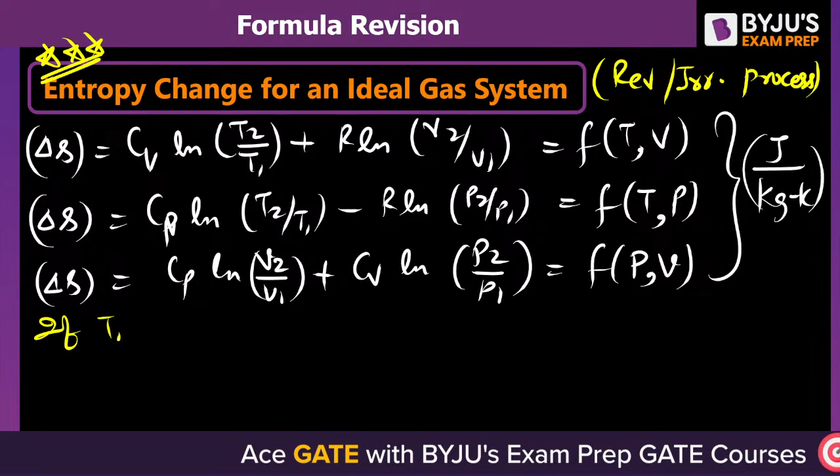If T1 equals T2, or U1 equals U2, or H1 equals H2 - because U and H are functions of temperature only in case of an ideal gas - then delta S will be equal to R ln of V2 by V1, or equal to minus R ln of P2 by P1. This is the special case for an ideal gas system.

And now the last part is entropy balance equation. We can say change in entropy of the system is equal to entropy transfer plus entropy generation. This is the expression for entropy balance, because entropy is a non-conserved property. There is a generation of entropy through the irreversibility associated with the process.

So the total change in entropy of the system, the entropy transfer will take place along with the heat transfer and along with the mass transfer. The entropy transfer takes place along with heat and mass. There is no entropy transfer that takes place with the work transfer.

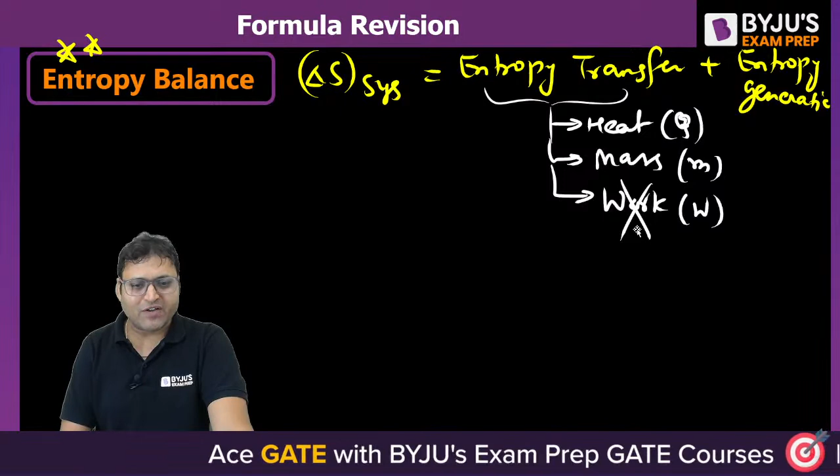Why will entropy transfer not take place along with the work transfer? Because work is an organized form of energy, so it will not transfer any entropy.

And entropy generation is due to irreversible process. It means for a reversible process undergone by the system, S generation will be equal to 0. When the process is reversible, entropy generation will be 0.

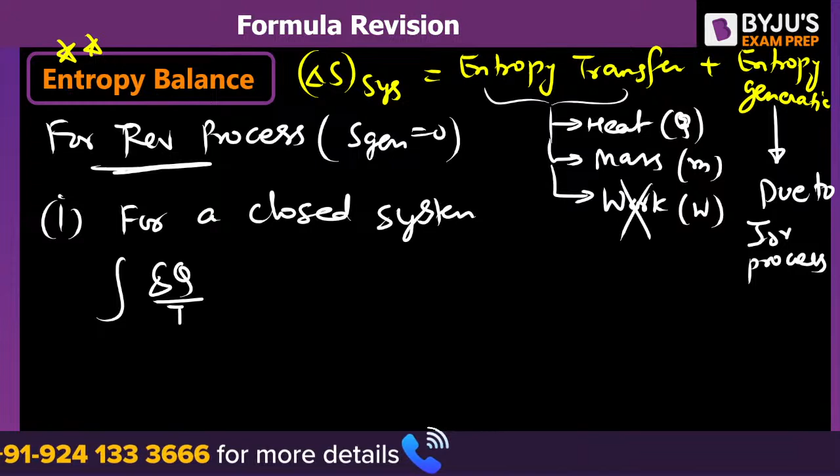So for a closed system, if the system is a closed system, there is no mass transfer taking place, only heat transfer. So we can say entropy transfer is due to heat transfer, del Q by T, 1 to 2, plus entropy generation is equal to S2 minus S1 of the system. This is the expression for a closed system.

If we write per unit time, so del Q dot, the unit is joule per Kelvin. If we write per unit time, this will be S dot generation is equal to ds by dt in the system, that is joule per Kelvin second or watt per second.

This is for the process, not the cycle. For a cycle, the entropy change will be 0, because entropy is a property. For a thermodynamic cycle we are talking about, but here these expressions are for the process, for a closed system undergoing a process.

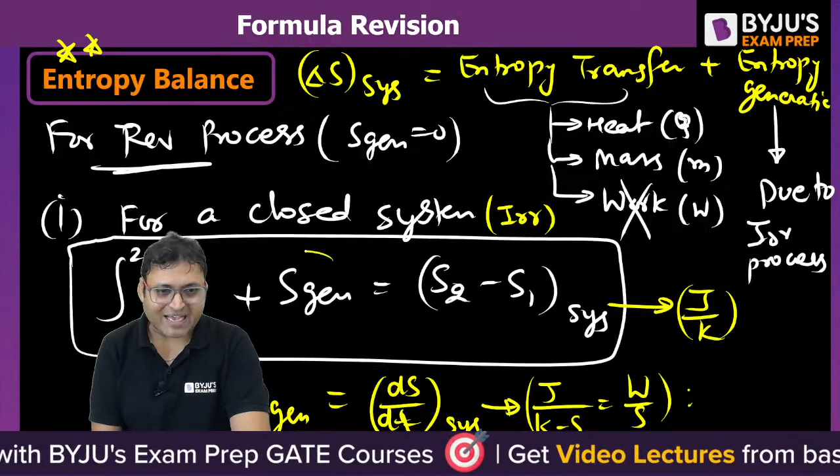For a reversible process, if it is an irreversible process, and if it were a reversible process, S generation would become 0. So this is the expression for a closed system undergoing an irreversible process.

And if the system is in steady state, for a steady state system, we can say ds by dt is equal to 0. So the expression will be del Q by T dot plus S dot generation is equal to 0. This is the expression for a steady state system.

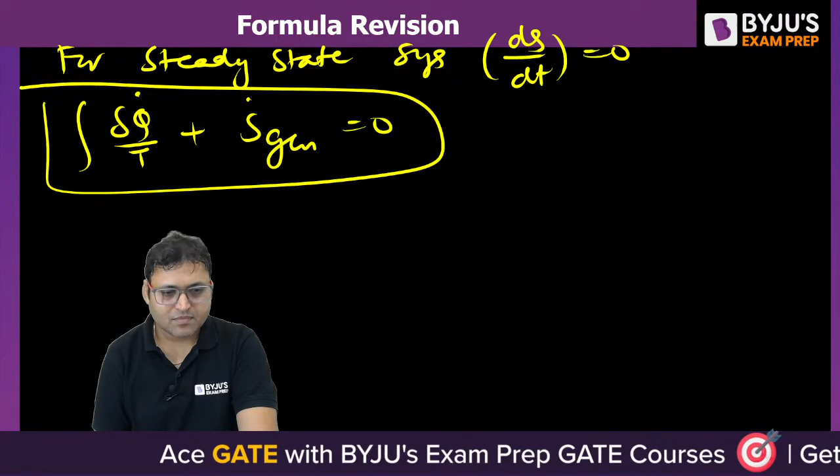For an open system undergoing an irreversible process, the entropy transfer will take place along with the heat transfer, and entropy transfer will take place along with the mass transfer, m dot I Si minus m dot E Se. Then entropy generation will take place, and entropy generation is equal to change in entropy of the control volume, that is S2 minus S1 in the control volume.

This is for an open system. This term is along with the mass transfer, this is along with the heat transfer, and this is due to irreversible process. So the left hand side is entropy transfer plus entropy generation, and the right hand side is the change in entropy. The unit is joule per Kelvin.

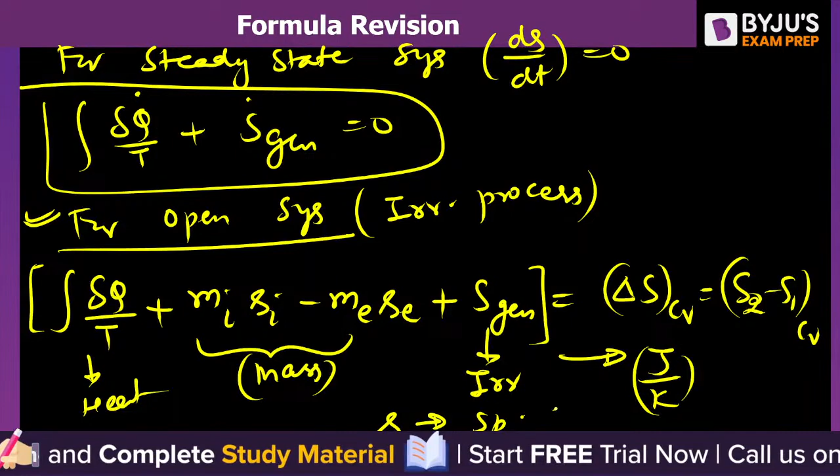If we write per unit time, then the expression will be the integration of del Q dot by T plus m dot I Si minus m dot E Se, where small s is the specific entropy, because mass is taken separately. So m dot I Si minus m dot E Se plus entropy dot generation is equal to ds by dt in the control volume. The unit is watt per Kelvin, joule per Kelvin per second.

And if it is a steady flow process, then we can say ds by dt in the control volume will be 0. So our expression is del Q by T plus, with mass flow rate also constant for a steady flow process, m dot into Si minus Se plus S dot generation is equal to 0.

If it is the reversible process, then S generation will become 0. If it is adiabatic process, then we can say Q will be equal to 0, or we can say the integration of del Q by T will become 0.

Is this clear? So that is how you can have the expression for entropy balance. These are the expressions for the entropy balance. So this is all about the entropy change.

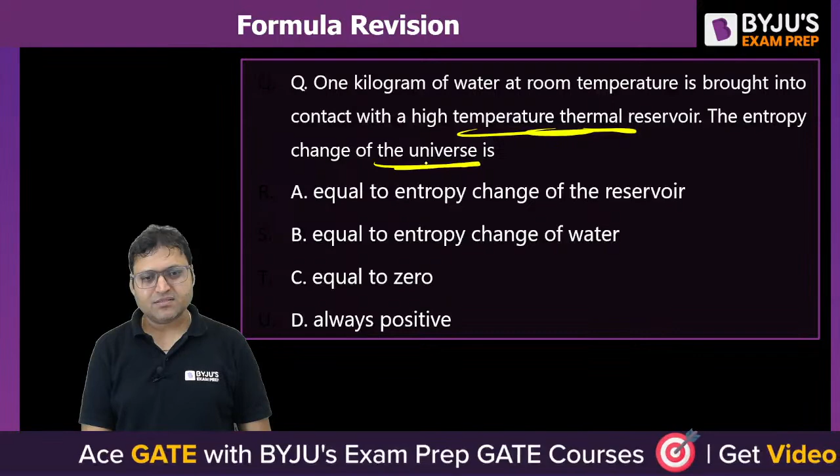Heat transfer is always an irreversible process. Only isothermal heat transfer is a reversible process, such as the isothermal heat transfer in the Carnot cycle.

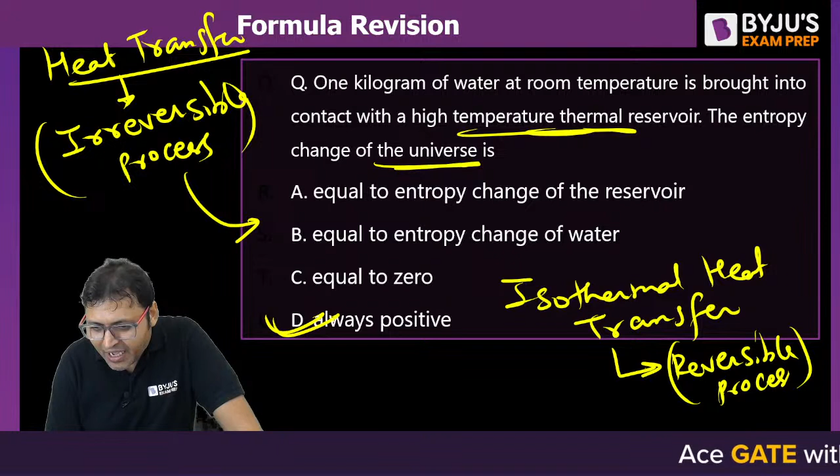So since it is an irreversible process, the entropy change for the universe is always positive. Why would you say entropy change will be A? It will not be A. For 1 kilogram of water at room temperature, let me call reservoir temperature T0, and the initial temperature of water T1.

So entropy change for the system is equal to MC ln(T0/T1), and delta S for the surrounding is equal to MC(T1 - T0)/T0, that is MC delta T upon T0.

So system and surrounding will not have the same entropy change, they are not equal. The entropy change of the system is positive, while this one is negative. So the entropy change for the universe must always be positive.